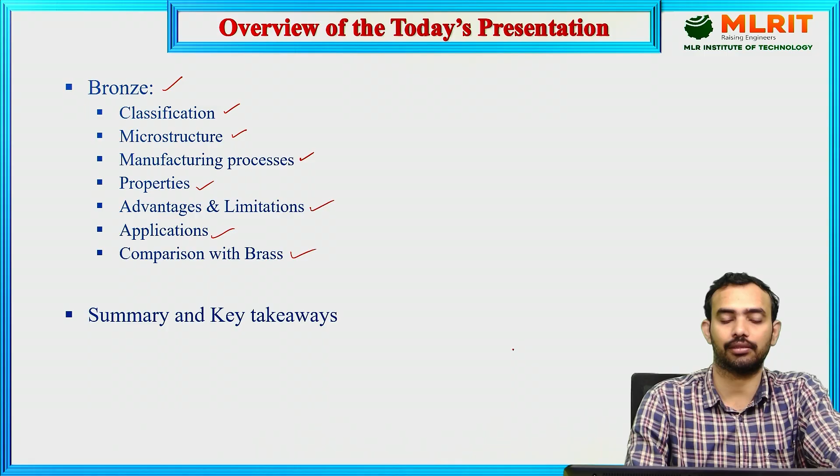What is the definition of bronze? What do you mean by that? We will cover the basic composition and classification, discuss the microstructure observed in bronze, look at certain manufacturing processes adopted, discuss the properties, advantages and limitations, applications, and comparison with brass. Finally, we'll summarize and discuss the key takeaways from the lecture.

So what is bronze? Bronze is primarily a copper alloy where the principal metal is copper and the alloying element is tin. The primary alloying element in bronze is tin, typically ranging between 5 to 20%. It is almost half of what is used in brass for zinc composition.

In brass, the zinc composition, if you recall, we discussed is between 35-37% and above that as well. And here in bronze, tin is added at a range of 5 to 20%.

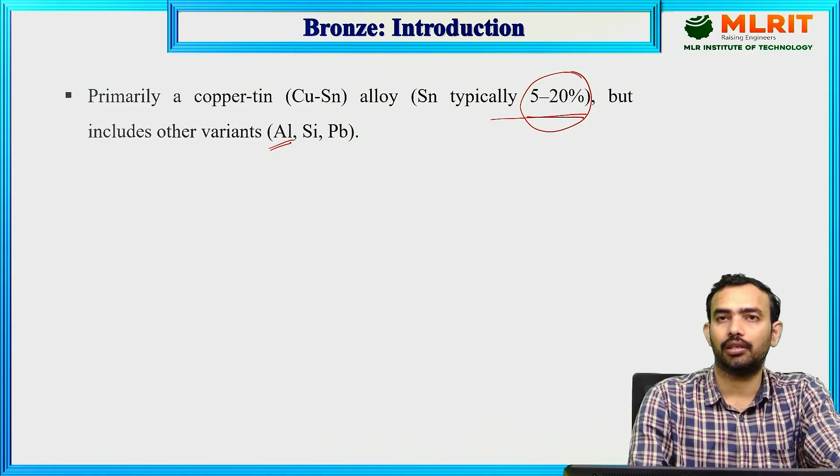In addition to tin, there could be other variants as well, other alloying elements which in turn bring new varieties for bronze, such as when it is added with aluminum, silicon, or lead. We will see the classification of bronze and discuss certain special alloys as well.

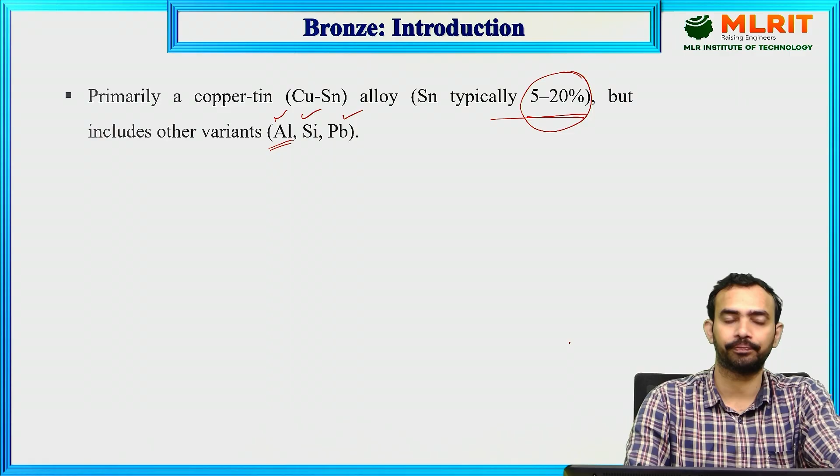If you see the historical significance, bronze is the alloy which has been used from very olden days, right from 3300-1200 BCE. From that era onwards this material has been used, and we call that particular period the Bronze Age, where most metals were being replaced with bronze, and its use is extensive across all empires and kingdoms. It is the first alloy used for tooling or in weapons as well.

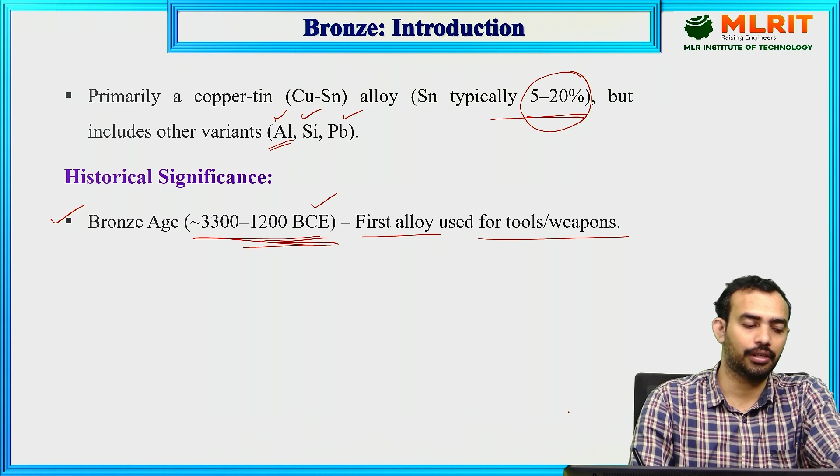So we have the Stone Age, Bronze Age, then the Iron Age, and currently the latest advanced materials era, which we call the Silicon Age or Nanomaterials Age.

The key features of bronze: it has very high strength compared to brass, it offers excellent corrosion resistance, and it has a low friction coefficient. These are the primary key features which made bronze extensively used in almost every engineering segment during this period. In the Bronze Age, people used bronze for tools, weapons, statues, architecture, and even kitchenware.

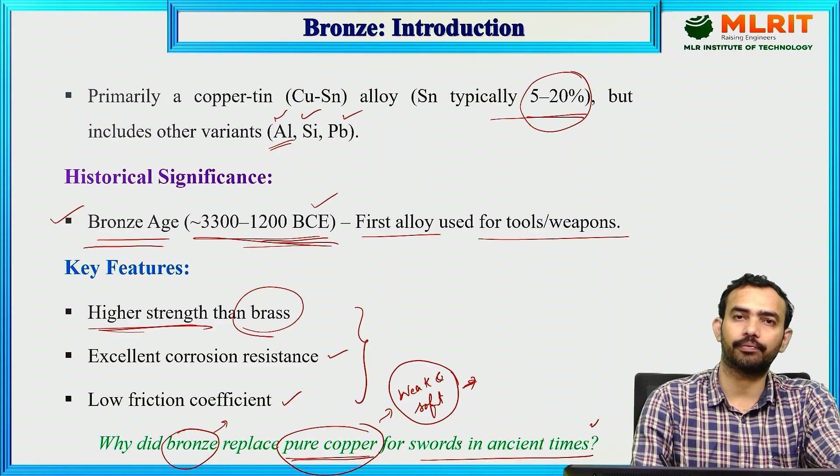Why did bronze replace pure copper for swords in ancient times? We know pure copper is weak and soft in nature. It doesn't have great mechanical strength, and being soft, it cannot be applied to tooling or weaponry applications. Whereas bronze, when mixed with tin, gives very good strength, and that is the major reason bronze became the replacement for pure copper for swords in ancient times.

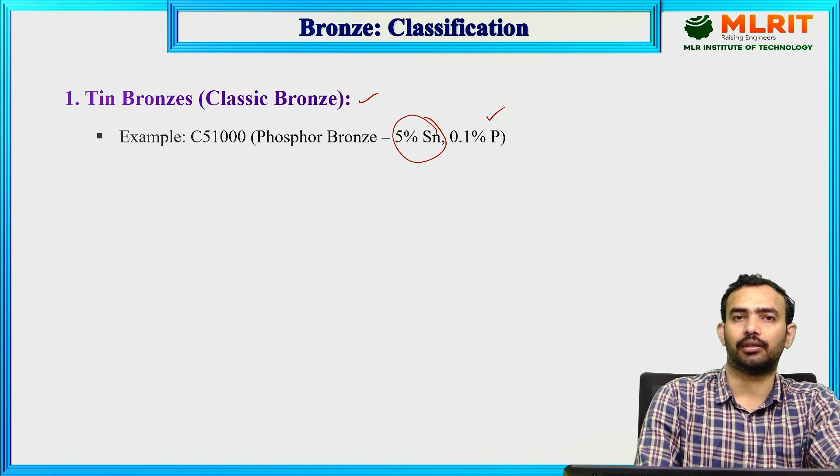Looking at the classification of bronze, we have tin bronzes, the classic bronze, where copper is mixed with tin. About 5% tin can be observed, along with certain amounts of phosphorus, restricted to 0.1 weight percentage. This is the classical bronze, tin bronze, with grade C51000.

Then we have the aluminum variant, aluminum bronzes, given with the grade C95400, where aluminum is added significantly, about 11%. It is a significant addition, with 4% iron also present in aluminum bronzes.

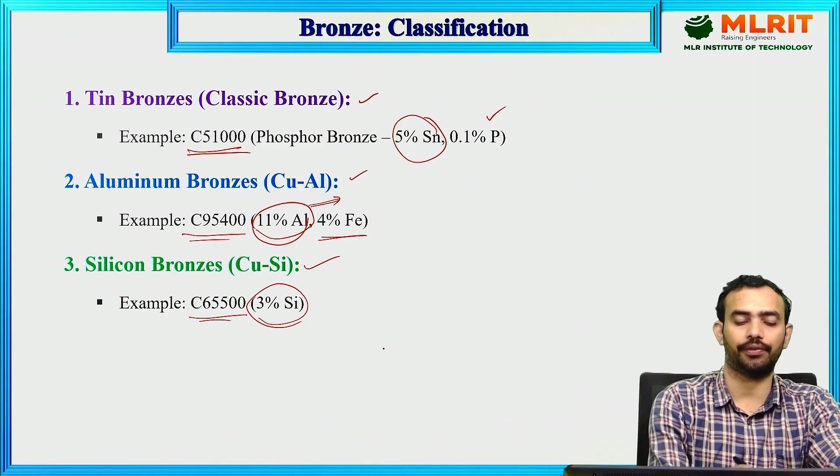Then we have silicon bronzes, so silicon is added up to 3% here, with a grade name of 65,500. So C is copper here. So leaded bronze, another variant, which is having 7% of tin and 7% of lead, given the grade name C93,200.

These are the four varieties that we can have in the bronzes. First one is tin bronze, that is a classic bronze, where the majority of the alloying element is tin. Then we have aluminum bronzes, up to 11% of aluminum can be present. Then silicon bronze, 3% of silicon added. Then leaded bronzes, where 7% of lead and tin is also present at 7%, so equal amounts of tin and lead can be observed.

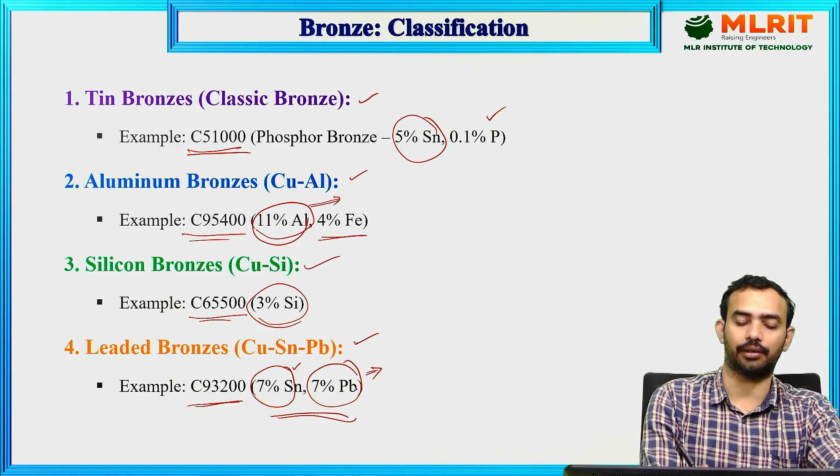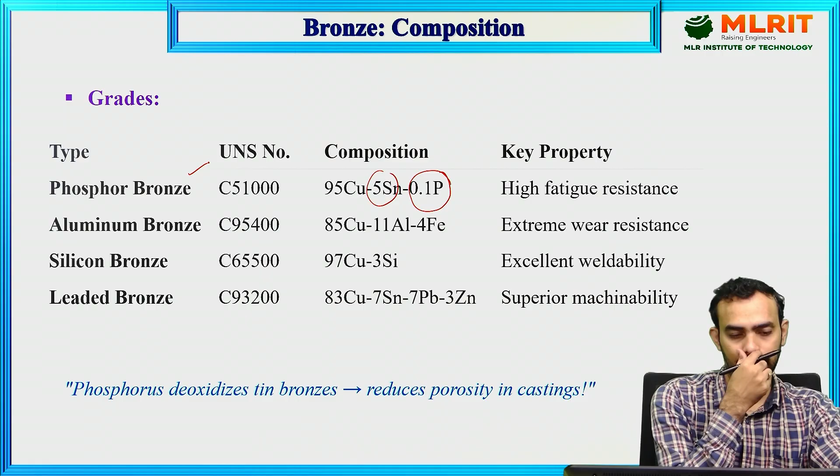If you look at the properties of these different classes of materials, starting with phosphorus bronze, where tin and a small amount of phosphorus can be present. This is also called classic tin bronze, where a small portion of phosphorus can be observed, similar to grade C51,000. This variety of bronze offers excellent fatigue resistance, performing very well under cyclic loading.

Then we have aluminum bronzes, where you can see aluminum as well as iron present in the material, with the remaining being copper, which has excellent wear resistance. The hardness of aluminum and iron contributes significantly to the copper, and we can notice extreme wear resistance. Obviously it cannot be compared with other elements. So in aluminum bronze, copper has been added with aluminum and iron, which is found to have extreme wear resistance.

Then we have silicon bronze, where copper and silicon are present. Copper is 97% and the remaining is silicon, up to 3%, which basically brings weldability. So the weldability of the copper alloy is very good with the addition of silicon, giving it excellent weldability characteristics.

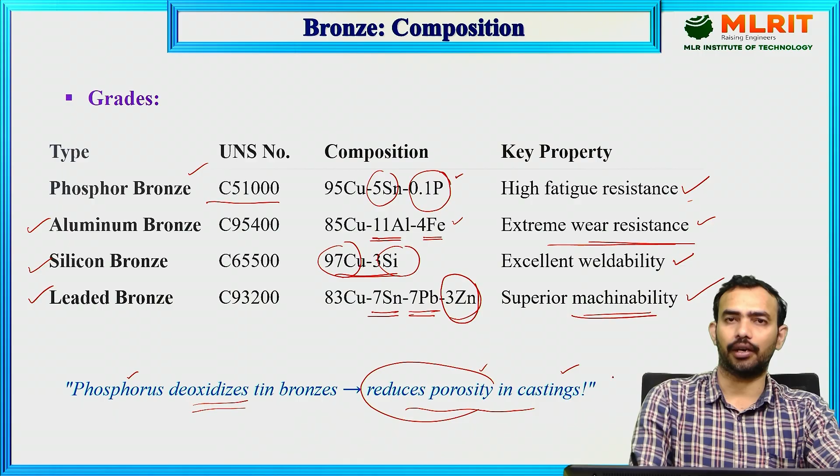Phosphorus deoxidizes the tin bronzes. A small amount of phosphorus deoxidizes the tin bronzes, reducing the porosities that might be found in the castings. So the chance of porosity can be reduced with the addition of phosphorus, just 0.1%, which reduces porosity in the castings.

If you look at the microstructure, tin bronzes have an alpha phase, which is the copper-rich phase. Then there's the delta phase, where we can see intermetallic compounds. Copper and tin intermetallic compounds are observed in the delta phase, which is hard but brittle in nature for tin bronzes.

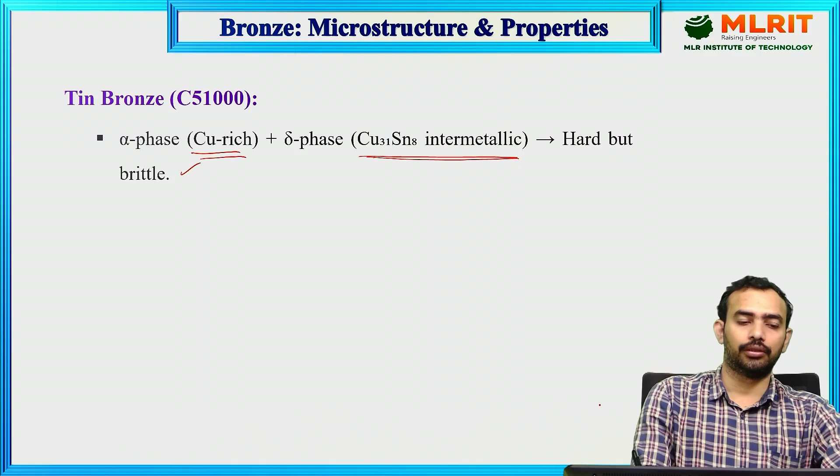Then we have aluminum bronze. Aluminum bronzes also have an alpha phase, then a beta phase, and in addition we can see the kappa phases also. These are basically iron and aluminum intermetallic compounds present as the kappa phase, which offers excellent wear resistance characteristics.

The delta phase present in the tin bronzes basically increases the hardness but reduces the ductility, and overall the brittleness of the material increases. This can be optimized with the heat treatment process, which can balance these properties.

Okay, if you see the mechanical properties of all these alloys, wrought alloy and cast alloys - this is phosphorus bronze or tin bronze, we can say. This we have aluminum, then silicon, then here is our leaded bronze.

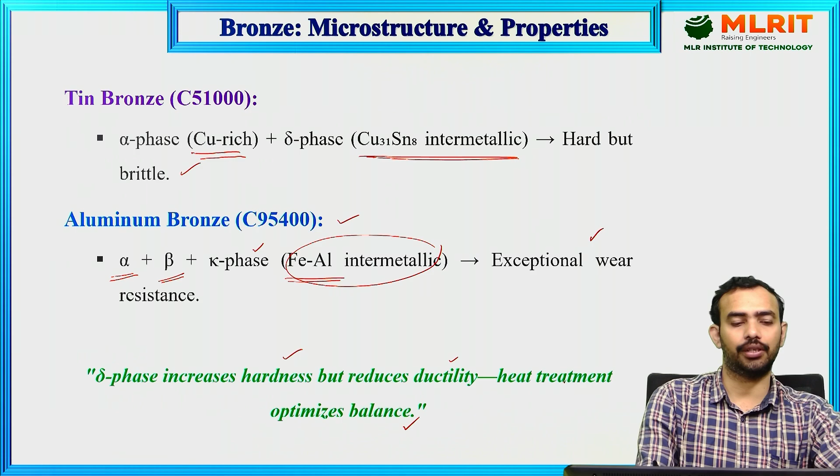So if we see its tensile property, with aluminum and the presence of iron, its tensile strength is also shooting up significantly, which is 750 MPa. It's a good number. In general, just with the addition of tin alone, it can have tensile strength up to 600, a pretty good number. And if you look at the elongation or ductility of the material, silicon gives very good ductility.

If you see the hardness parameters, because of the phosphorus here, it is becoming very hard. Our wrought phosphorus bronzes, because of the presence of the delta phase, become very hard and brittle, so their ductility is significantly reduced.

Now if you see the hardness value, it is very good for aluminum and aluminum based bronzes. With the addition of iron, it gets good tensile strength as well as hardness. So there is a trade-off we can work with, that is the amount of tin and the aluminum percentage. If it is increasing in the copper, it increases the strength, but decreases the ductility. You can observe it here also: at 11% aluminum, ductility is significantly reduced, resulting in very low ductility.

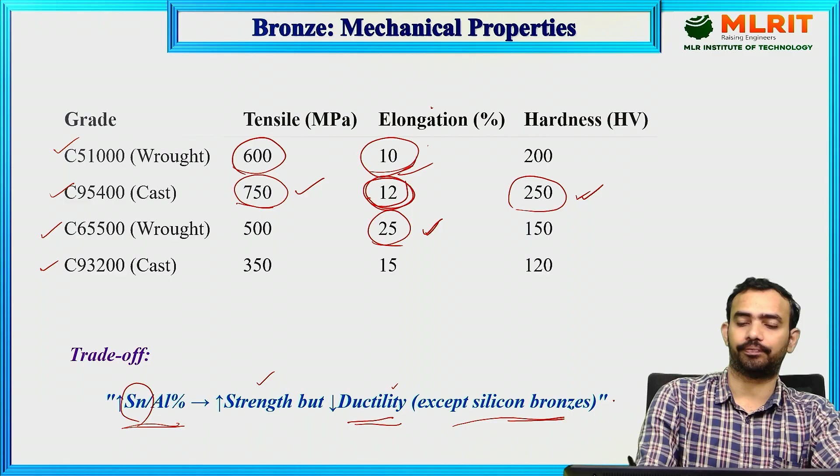If you see the corrosion and wear resistance properties, particularly with seawater resistance, aluminum bronzes outperform stainless steel in marine environments. Stainless steel, even though it is said to be very good, having excellent corrosion resistance among steels, cannot match aluminum bronzes. So aluminum bronzes always outperform stainless steels, especially in seawater corrosion resistance applications and marine environments.

In the case of oxidation resistance, aluminum bronzes - copper itself, bronze - can have an oxidative layer, which generally acts like a corrosion resistance layer. With the addition of aluminum into the bronzes, aluminum creates this protective layer, an Al2O3 ceramic layer, which in turn offers the corrosion resistance of the material.

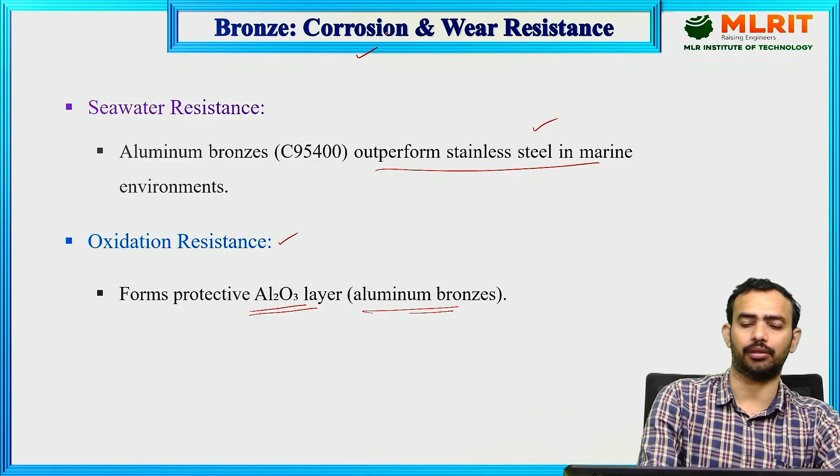If you see the wear resistance applications, the kappa phase in the aluminum bronzes resists abrasion. Kappa phase is an intermetallic compound - an aluminum-iron intermetallic compound. These intermetallic compounds in the aluminum bronze resist abrasion, and these are ideal candidates for bushing applications.

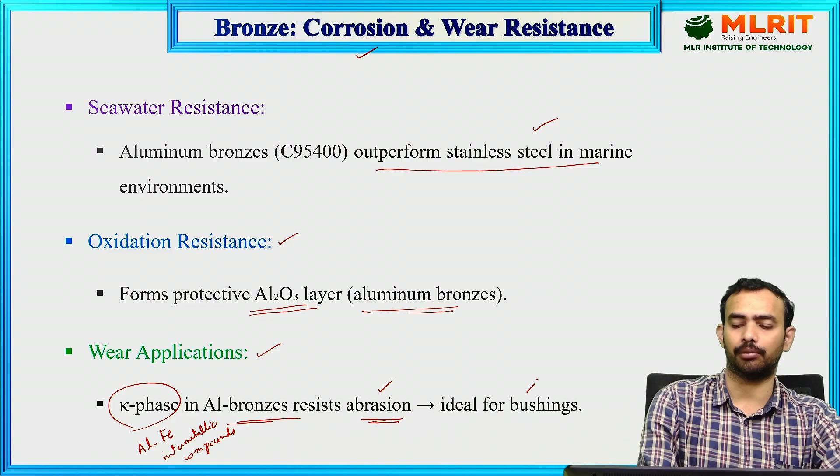If you see the applications of bronzes, they find their applications in marine, electrical, art, and automotive sectors, and some of them are listed here. There are many applications that we can notice from the BCE era of bronzes.

Particularly, if I take the marine applications, aluminum bronzes are very good. They find extensive use because of their very high seawater resistance, that is corrosion resistance, and that's why marine propellers are being manufactured using this variety, and pump casings, including submarine pump casings, are also manufactured using aluminum bronzes. Then we have electrical applications.

For electrical applications, general classic bronze can be used, where certain springs and connectors have been manufactured using bronze. Then for art and architecture purposes, we have this silicon variety, which has very good ductility. For art and architecture purposes, it needs to have very good ductility, so silicon bronzes have been ideal candidates for making certain sculptures and roofing.

Then in the automotive segment, we have the leaded variety, because machinability is one of the prime requirements. So leaded bronzes are being used for manufacturing certain bushings and bearings.

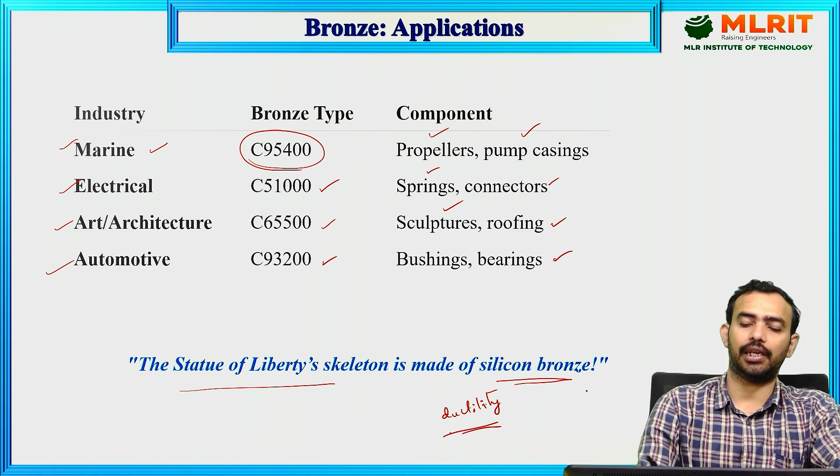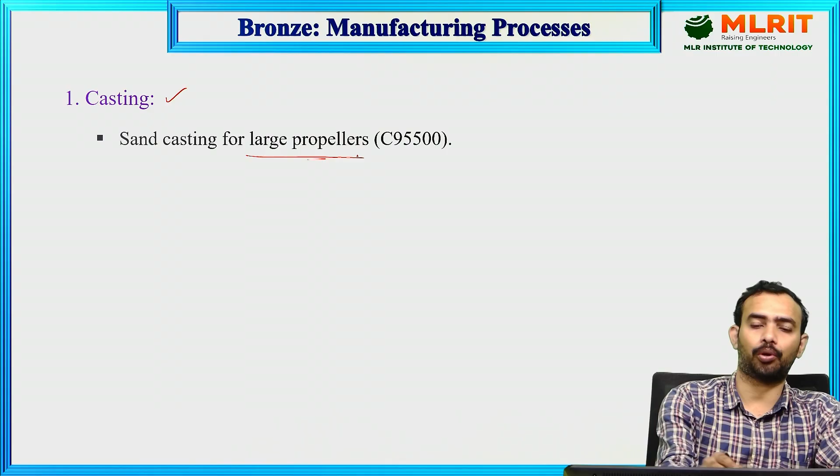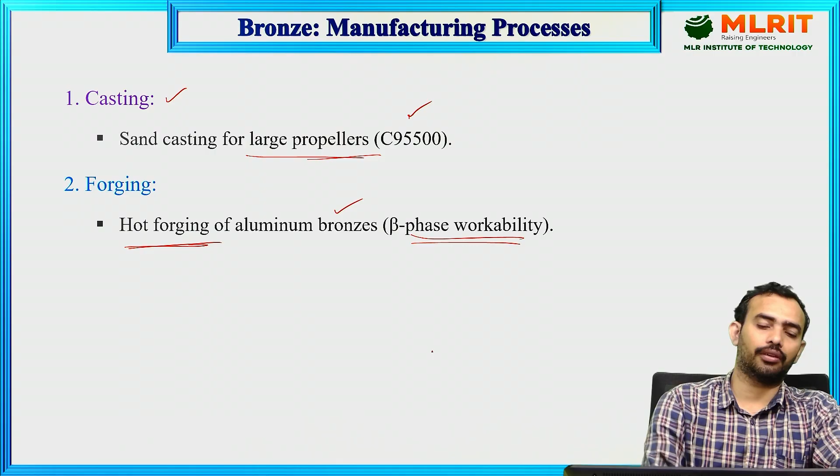If you see what manufacturing processes have been adopted for bronzes, primarily we do casting, particularly sand casting, which can be performed for manufacturing large propellers, especially marine propellers, using aluminum bronzes. Then forging is another manufacturing method, hot forging for aluminum bronzes, where the beta phase offers workability, making hot forging possible for aluminum bronzes.

Then for machining operations, basically leaded bronzes are suitable, or preferred for screw machining. So these are some of the manufacturing processes we use: sand casting, then forging, hot forging, and then for machining, leaded bronzes are being used.

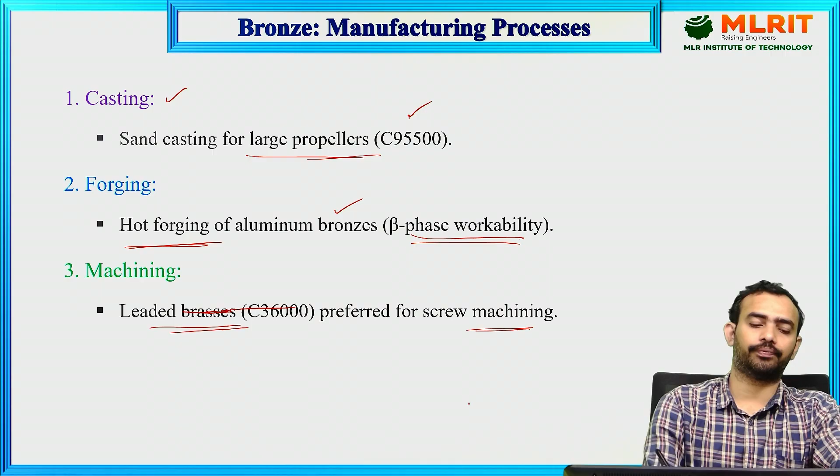It is not brasses; it is basically leaded bronze. Sorry for that.

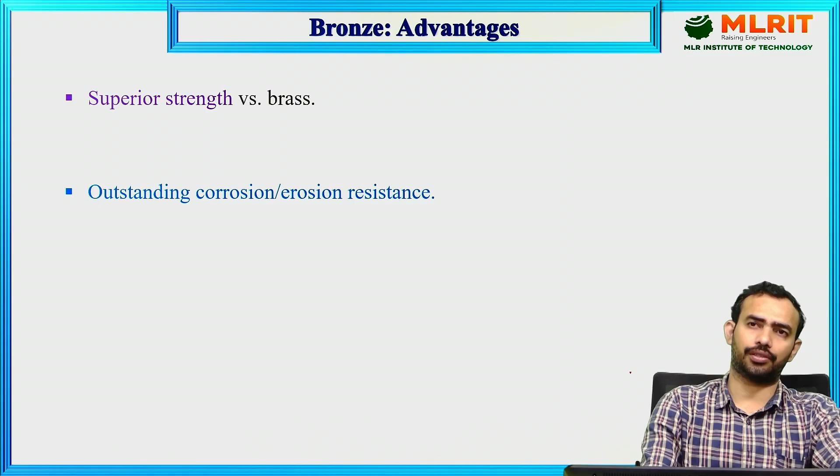Advantages: it is having good strength when compared to the brass. It is having outstanding corrosion and erosion resistance or abrasion resistance, particularly with seawater corrosion resistance or oxidative corrosion resistance. Both are very good.

Biofouling resistance is also very good. So if any biological materials get adhered to the metals and cause certain reactions, that can be avoided using these bronzes, having excellent resistance against biofouling also.

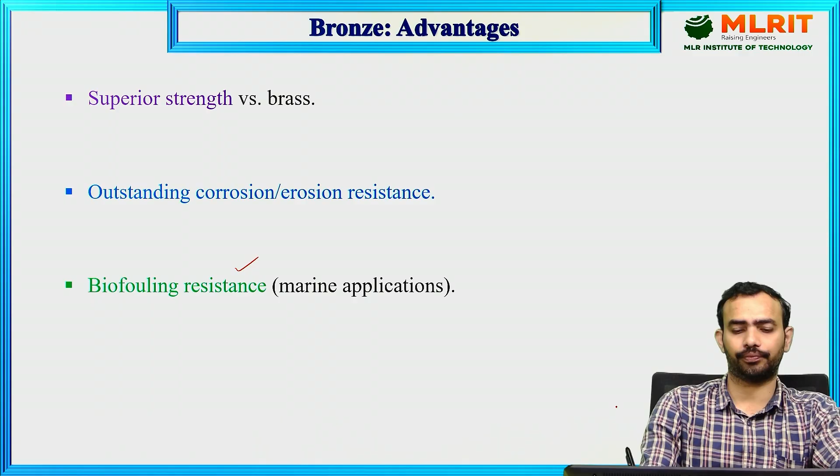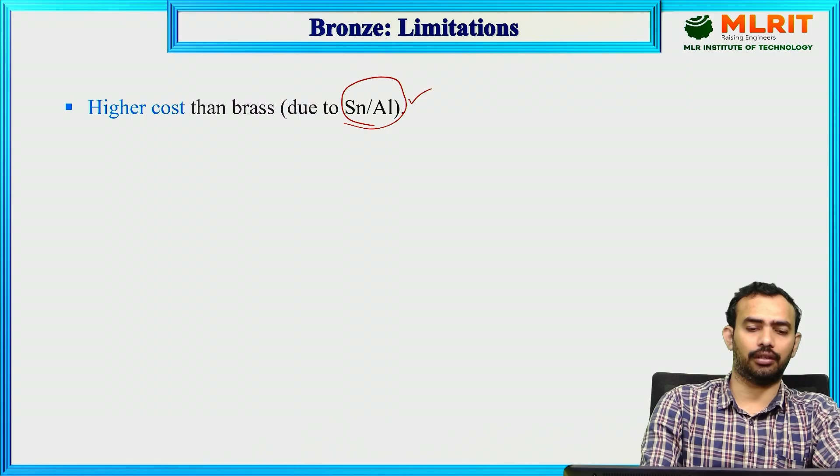Then there are certain limitations. These limitations are high cost when compared to brass because of the addition of tin and aluminum. The manufacturing process is slightly challenging, and material cost is higher. So relatively it is higher cost than brasses, and it involves a complex heat treatment process for certain grades of bronzes. These are the limitations or challenges involved with bronzes.

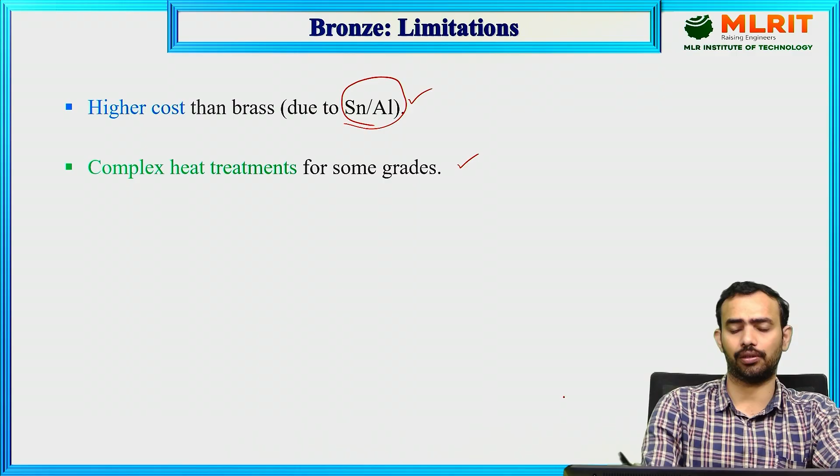Apart from that, bronze has been extensively used since ancient times. And we have certain special bronze alloys that we can talk about.

One is beryllium copper. Beryllium is added to the copper alloy. It's a special bronze alloy; it's not technically a bronze, but it's worth mentioning. We add 2% of beryllium, and it is given the grading as C17200, which is basically the highest.

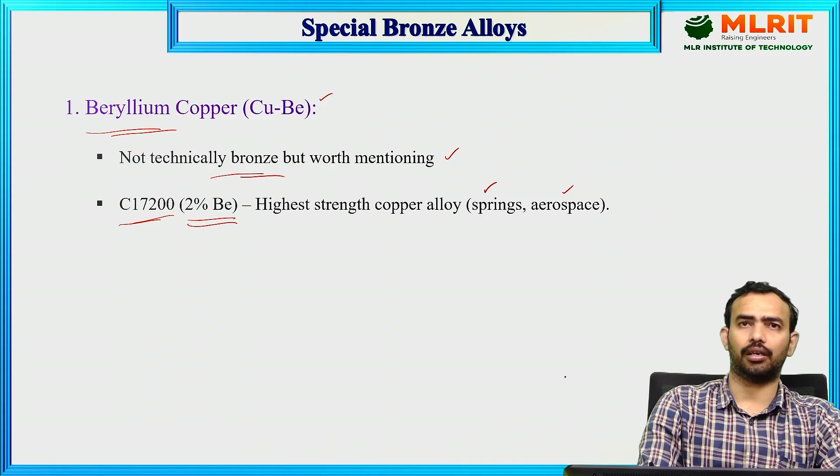It is offering the highest strength copper alloy. Among all copper alloys, this beryllium copper will offer excellent strength, which finds its applications in manufacturing springs, aerospace components, and other aerospace applications.

Then we have nickel aluminum bronze, where nickel is added, and aluminum is also present, as in the aluminum bronzes. This finds its applications in marine conditions. Aluminum bronzes are suitable for marine applications, and if you have extreme marine conditions like very high or very low pressures, such as submarine applications, these nickel aluminum bronzes are suitable.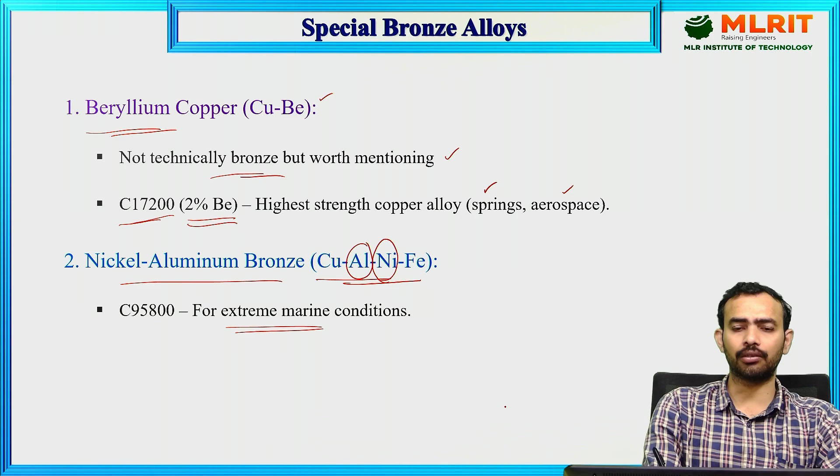So these are the two special bronze alloys worth mentioning. If you look at the comparison with brasses, bronze has a higher strength, almost double the tensile strength, about 600 MPa. Corrosion resistance is excellent for bronzes, and that's why it finds applications in marine or seawater environments, whereas brasses are often found with dezincification risks, as we discussed in the previous lecture.

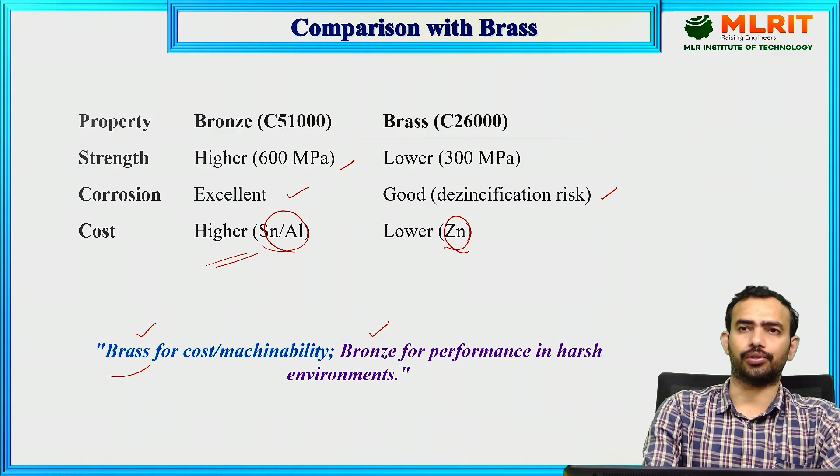But the condition here is in terms of cost or economy. Bronze is relatively higher cost compared to brasses, where brasses are alloyed with zinc, and bronze is alloyed with tin or aluminum. So overall: if you are looking for machinability and relatively low overall material cost, the option could be brass. If you are looking at performance, particularly in harsh environments like seawater or marine conditions, we can opt for bronze. This is the trade-off we have to make with these materials.

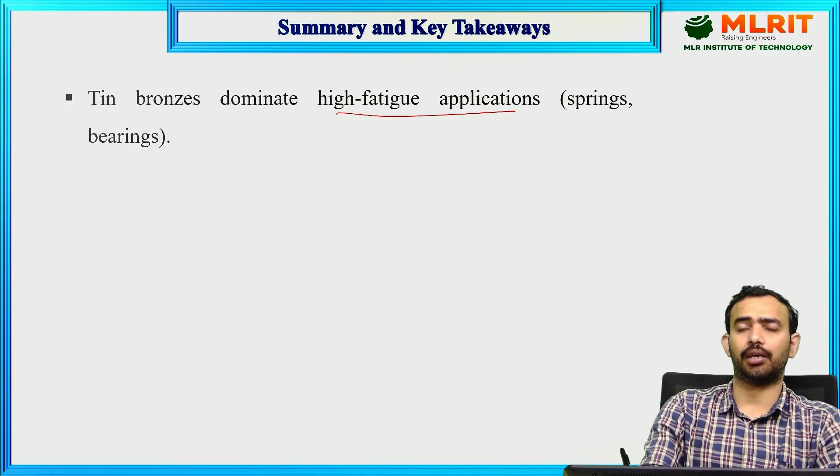To summarize, tin bronzes, the classic bronzes, dominate in high fatigue applications, offering excellent fatigue resistance. So springs and bearings are applications where these tin bronzes are employed.

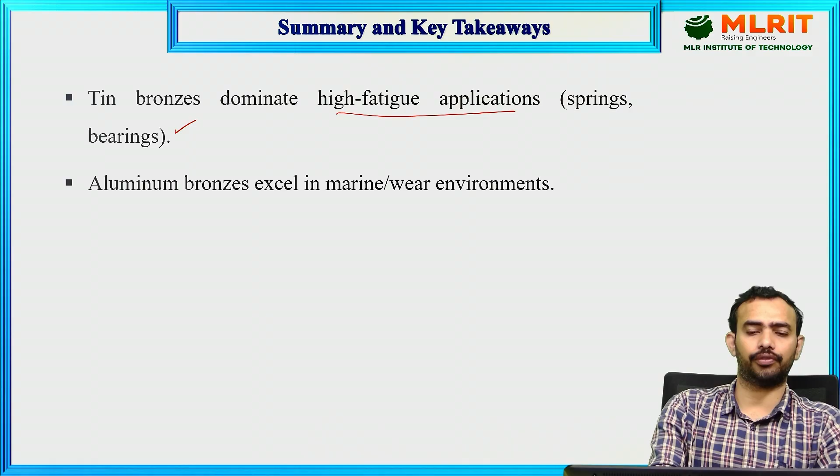Then aluminum bronzes excel in marine, seawater, or wear environments, where they offer excellent wear resistance as well as seawater resistance.

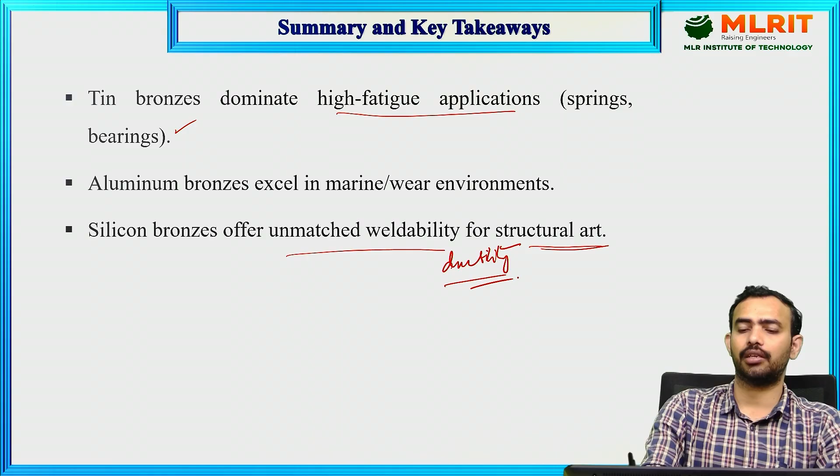Then we have silicon bronzes, which offer unmatched weldability for structural art. They offer very good weldability, and in addition, very good ductility. The percentage of elongation is also pretty good, which makes for good moldability, suitable for art or architecture applications.

So bronze, an alloy that built empires once in the ancient era, is now excelling in today's world—in propelling ships, particularly submarines, and in electronic components which connect circuits.

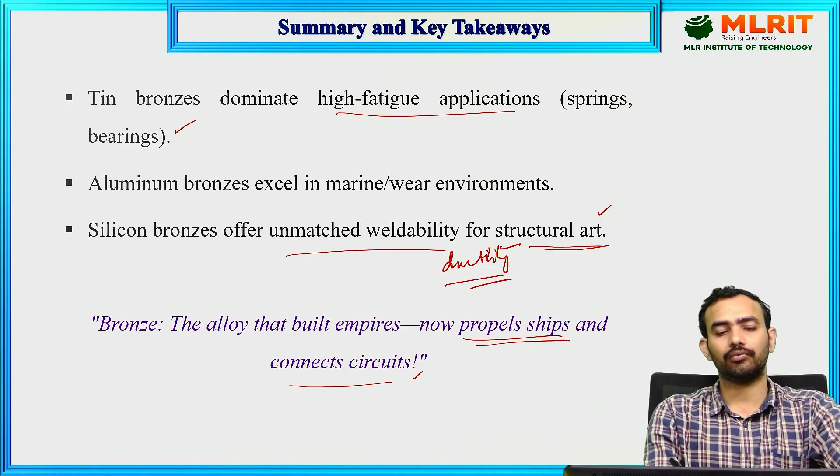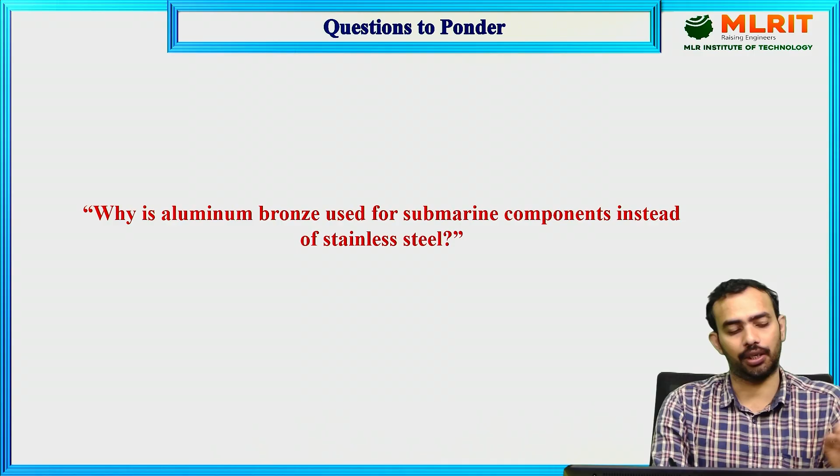Here is a question for pondering: why is aluminum bronze used for submarine components instead of stainless steel? We have already discussed this. Here is a hint for you: galvanic compatibility.